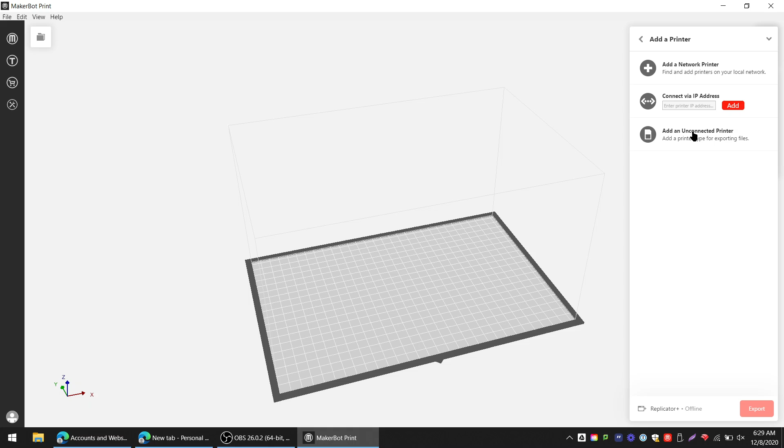Okay, first thing you're going to want to do is add a printer so you can see the print settings. So you're going to click down at the bottom right here, and then click on Add Printer. You won't have anything listed, so you're going to add an unconnected printer right here. We have a Replicator Plus. When you click that, this should show up, and you'll be able to look at the print settings.

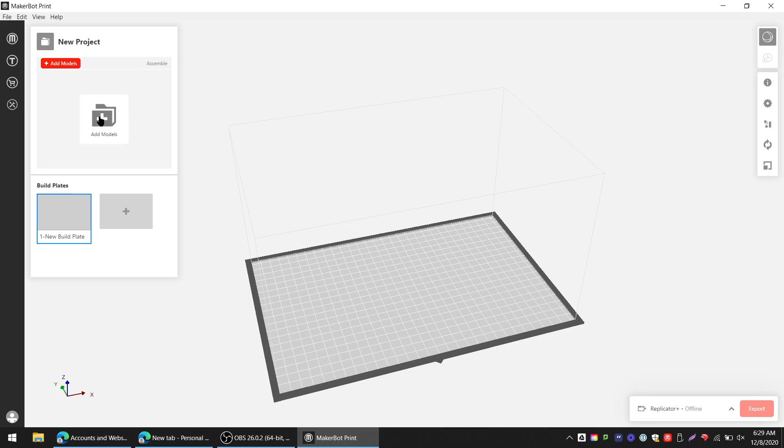All right, so this is the workspace. These are your print settings in the top right, your printer, which we already looked at, in the bottom right. On the left, we have your project panel, which shows you what project you're working on, which models you're using, and then you have your normal menus in the top.

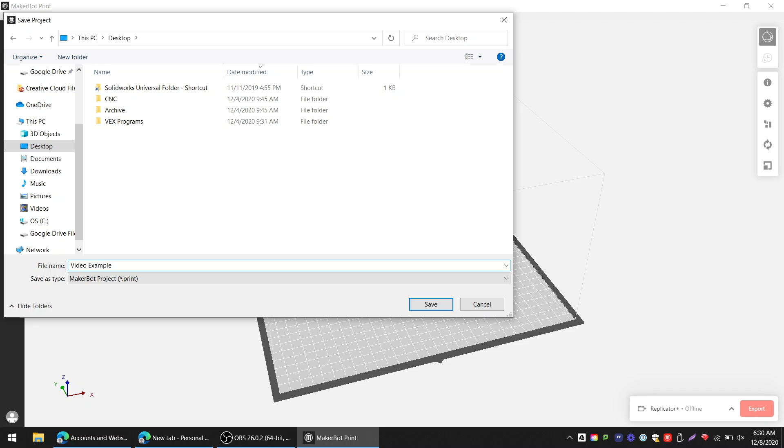All right, so to add a new model, first thing is you should rename the project. So go to File, Save Project, and you're going to name this something based off of whatever you're making. So you can call it Holiday Project or whatever you want to name it that makes sense to you. I'm just going to say video example. Okay, so then you can save that, and that's going to save that file.

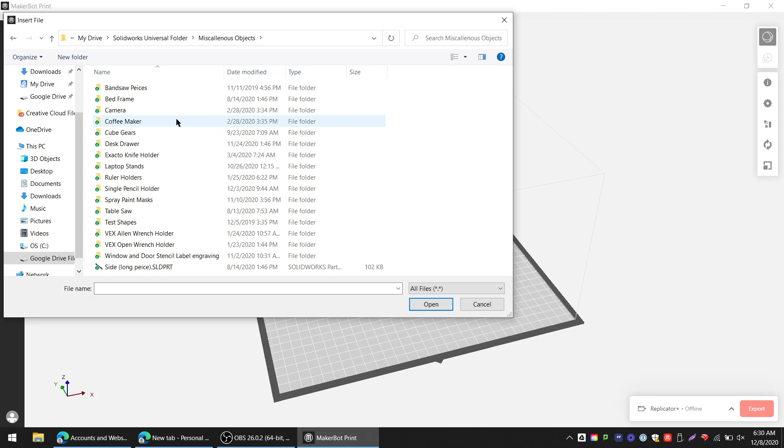Okay, and it'll look like this. It's a .print file. Once you have that saved, then you can add your actual model in. You can see the names here now. So you click this, and you just need to navigate to your project folder. I'm just going to pick something random in here, but you need to go to Desktop, Your Name, Project Folder, and then find whatever part you're trying to load in.

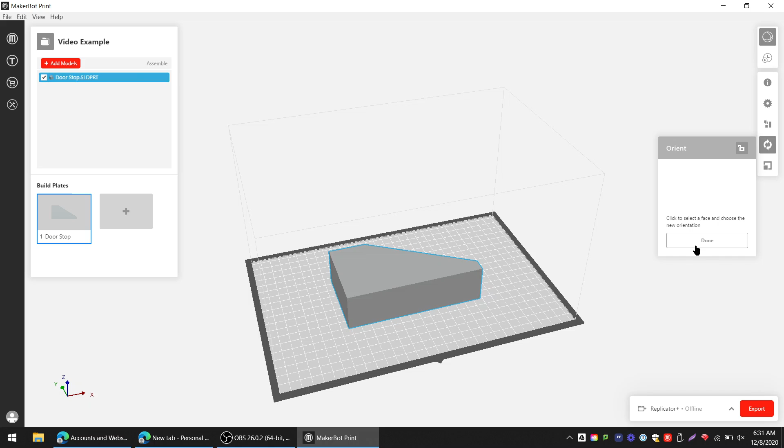Okay, so the settings over here, you have settings to arrange. This moves the part on the build plate, and this will automatically arrange it. Next one down is orientate, so you want your bottom, obviously, to be touching the build plate. So I always use this, place face on build plate, so I want this part to be on the bottom, and that'll rotate that for you.

And the last one is scale. So you can use this if your print uses too much material, you can scale it down so it doesn't use as much material. To do that, I select the object I want to scale, and then I can put in the actual size, or I can do a percentage. So if I want it to be half as big, type 50, and that will scale it down. Uniform scaling means it'll keep the same proportions, so these are the same proportions as it was when it was bigger, now it's just smaller.

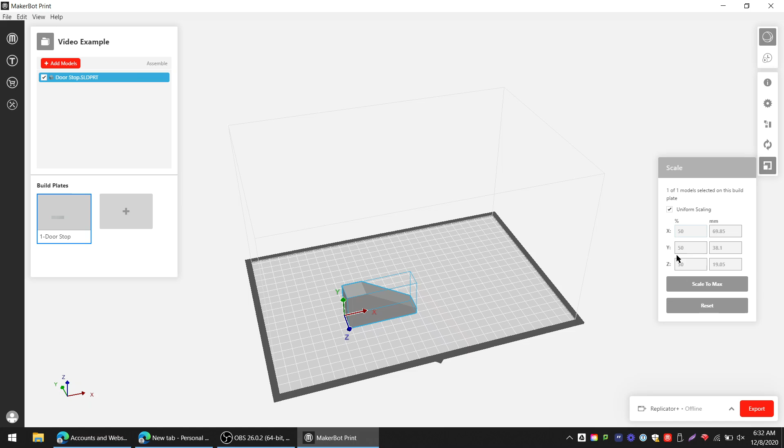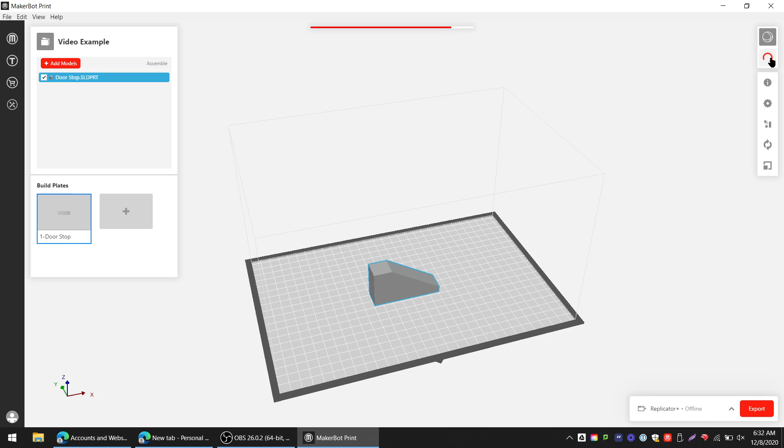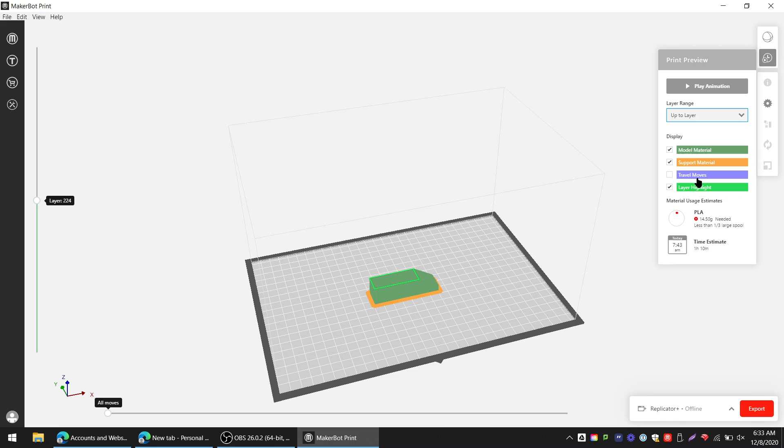All right, so to check how much material your print is going to use, there's a button that looks like this with the clock on it. This will run an estimate of the print and give you an idea how much material it's going to use. So we'll wait a second for this. Okay, so you can see kind of what it's going to look like, and over here, this will tell you it's going to use 14 grams to make this print. So about 14 grams.

Now, you can change that number by changing the settings, and I'll have another video that goes over all the print settings inside Makerbot that you can watch and see how to manipulate and change the print settings.